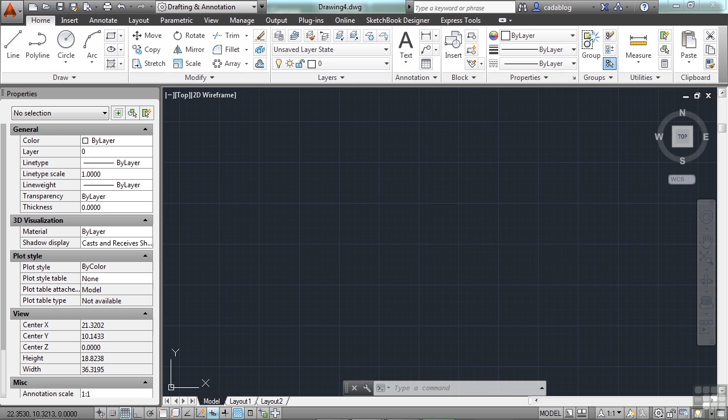Once the modeling is complete, we have to annotate it to display it to others and to show them what its features are. Let's open up the mechanical example file. AutoCAD is organized into two different working environments, or spaces, to help us accomplish the creation of our documents. They're represented by the Model Space and the Paper Space tabs, as seen here on the bottom of my screen.

Sometimes these tabs can be hidden, appearing instead as buttons on the status bar at the bottom of the application window. So if you don't see these tabs, you can turn them on by right-clicking the buttons and clicking to turn them on. They should be right here, Paper and Model.

Also, if you go to the Options window, there is a layout element here in the Display tab, and it says Display Layout and Model tabs. If I turn that off, they go away. Let's turn them back on, and I suggest that you use them. Leave them turned on all the time.

Typically, a model is composed of geometric objects, and it's created in a three-dimensional space called model space. In AutoCAD LT, it's only a two-dimensional model space, as we see here. A final layout of specific views and annotations, like text and dimensions, of the model will be created in a two-dimensional space called Paper Space, or the Layout tab.

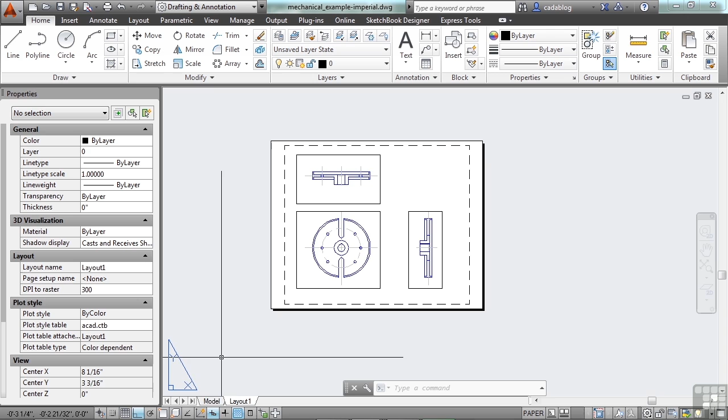These spaces are accessible on two or more of the tabs near the bottom of the drawing area. We have Model and Layout. Working on the Model tab, you will draw your model or your line work, and the subject of your model will be drawn at a 1:1 scale. So in the case here, this is drawn at 3 inches. So this little flywheel that will be constructed will actually be 3 inches wide.

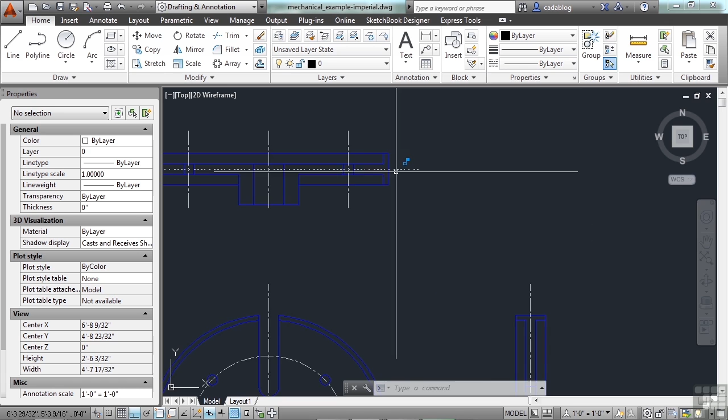Each layout has a picture in it, or a frame. It's called a viewport. This viewport gives you a photograph of the model that's in model space. Think of it as a window peering into model space. Each layout viewport contains a view. It displays the model at a specific scale and orientation, and you can specify what those are. You can also specify which layers are visible in each layout viewport.

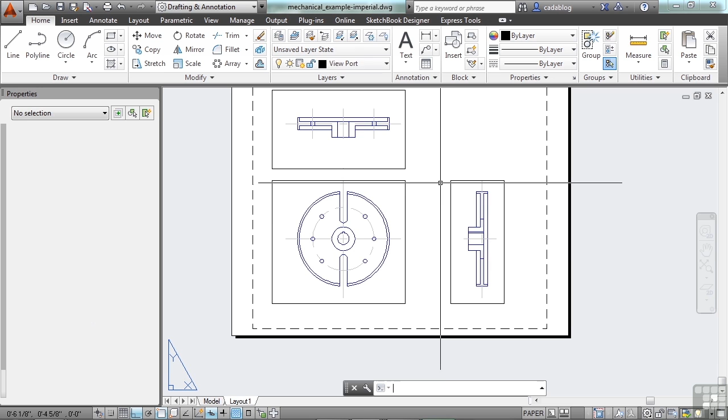After you finish arranging that layout, you can turn off the layers that contain the layout viewport objects. Alternatively, you can also set the viewport layers to a no print setting so that these rectangles or squares won't be visible when you print it out. In either case, the views are still visible. So the line work of our flywheel here, you'll still be able to see when printed, but these big ugly squares, they won't be.

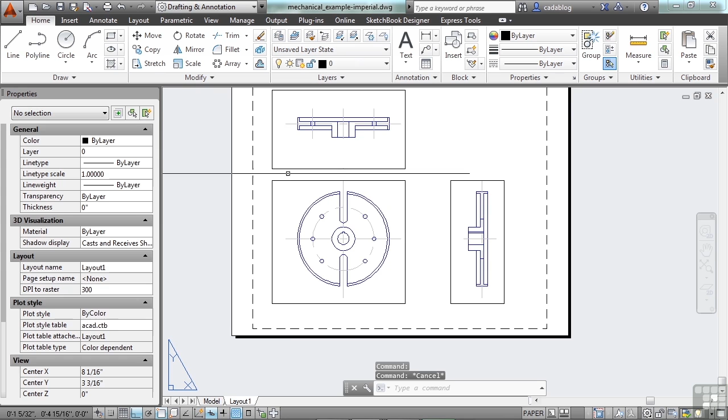That's really where your layer manager comes into play. We have the viewport layer, and it's set to not plot. These viewports are on that viewport layer. So when you go to print, you won't see these squares. If you want to see them, then that's okay too. But oftentimes you don't want them to be displayed.

So very briefly here, model space contains the drawing geometry or the model. Paper space contains what will be printed out on paper.